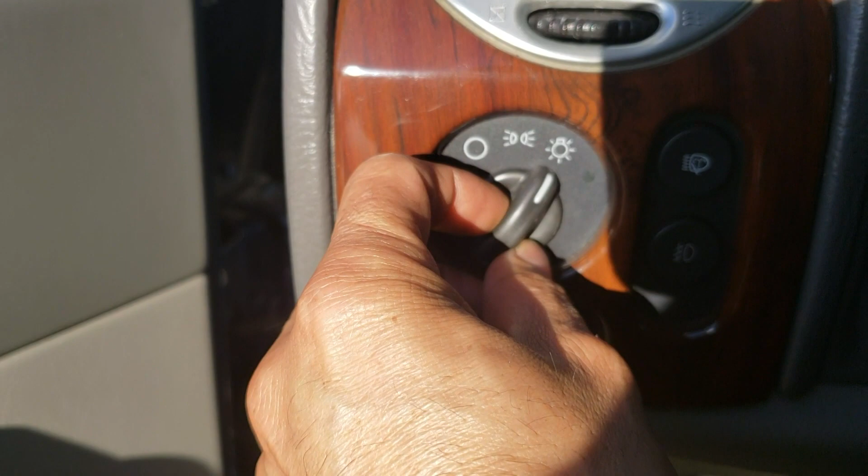Got this customer today who called me for this GMC Envoy XLT 2002. The customer concern is the headlights: the low beam doesn't work, only the high beams. So when we do this here, they work. You can see here, and if I go inside, we can probably see it reflect on the other vehicle. It's hard with this light, but I confirm that one is working, but the low beam isn't. So I'll leave it there.

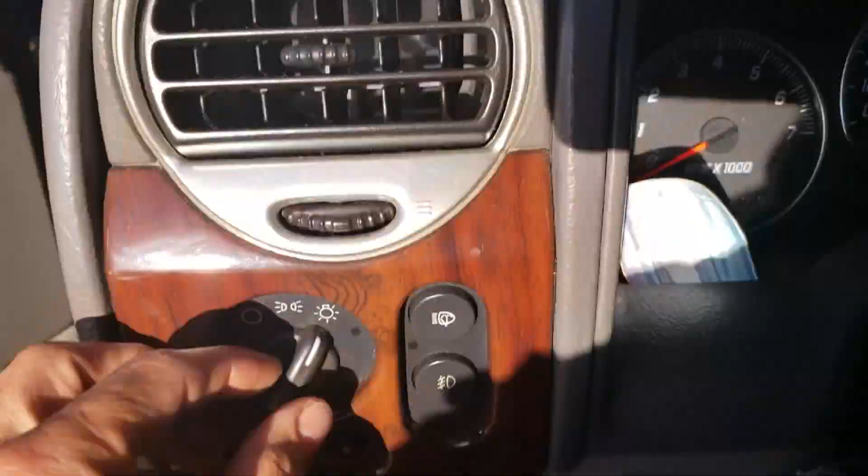We're gonna go here to the front. Pretty sunny day, and it's late in the day, so we can see here this light is illuminating. However, the low beam is inoperative on both sides. Okay, so the next step for me is to go to the wiring diagram to know where I'm going next. So pull out the wiring diagram and go from there.

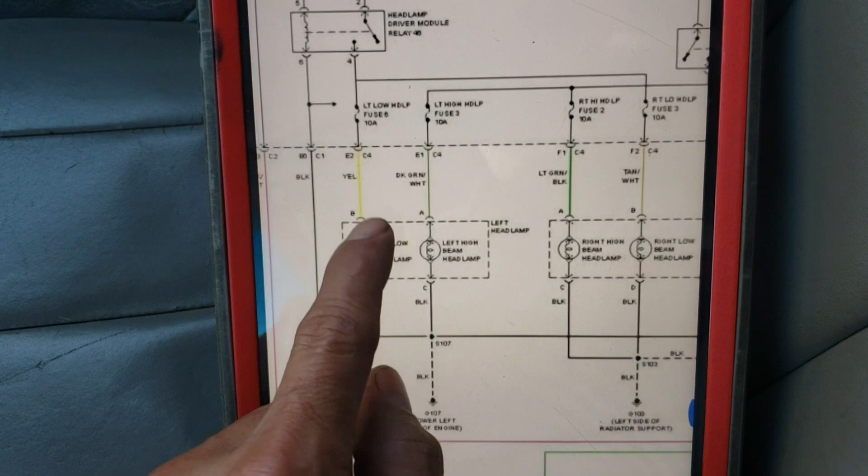So I got here a wiring diagram, and you can see here the left headlamp. Right here is the low beam, yellow wire, and this is the power side, and you got a constant ground here, lower left. So we can see you got a constant ground on the lower left side of the engine, black, and that ground is feeding both sides, low beam and high beam. So that means my ground is good because my high beams are working.

Sorry, I have to be cutting off, I get a bunch of phone calls now, so I don't know where I was.

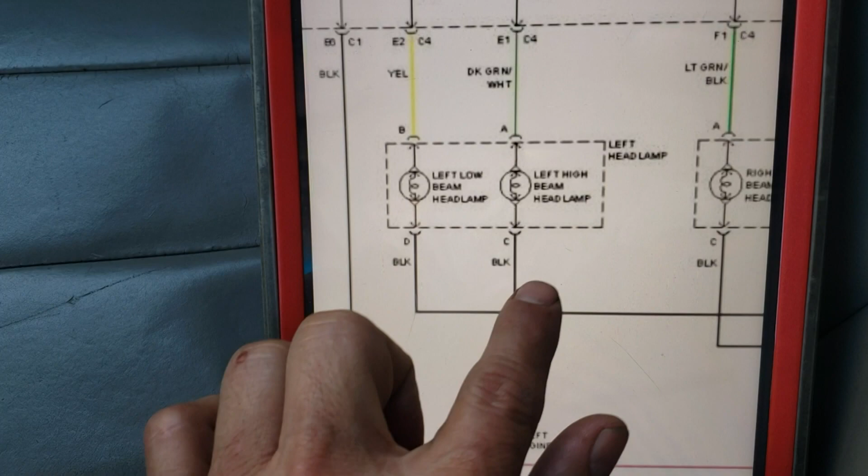However, we have here a constant ground which is shared for both low beam and high beam. So at this point I'm not suspecting the ground since my high beam is working, and my low beam on both sides is not working. So I'm thinking something in common. It could be a fuse here. You can see the yellow is the power feed to those, but it's coming from a fuse here. However, if we go here, we can see from the relay, from the switch side, it's coming here, and there is a fuse here too. However, with both not working, there's a slight chance that both fuses are blown.

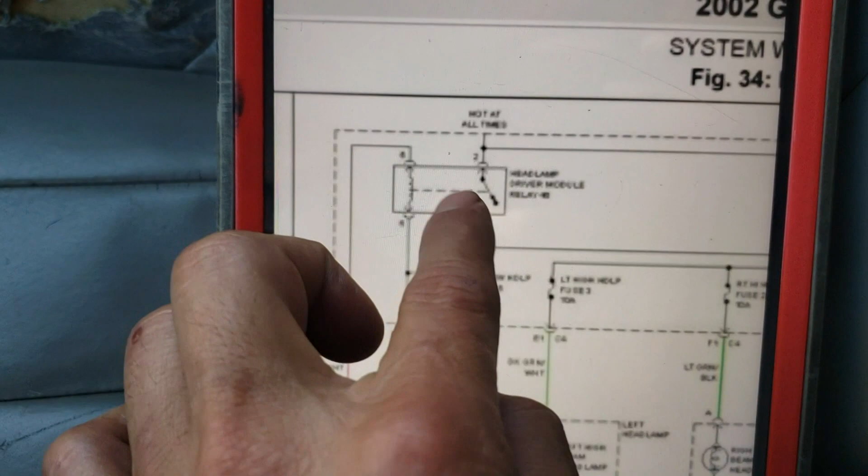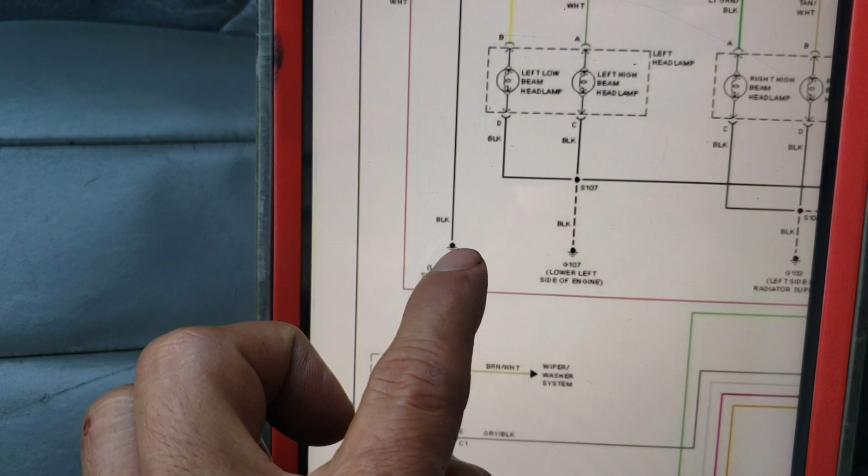So this is hot all the time to the relay right here on pin 2, and pin 4 is the switch side, which has power all the time on pin 2. On pin 4, when the coil closes, it connects here and sends the power to those. Okay, so we're gonna check the control side. Where is that coming from? On pin 6, which is this one here, we can see it is a fixed ground, so we got a constant ground. So then we're expecting this one to be the power side, by the pink and white.

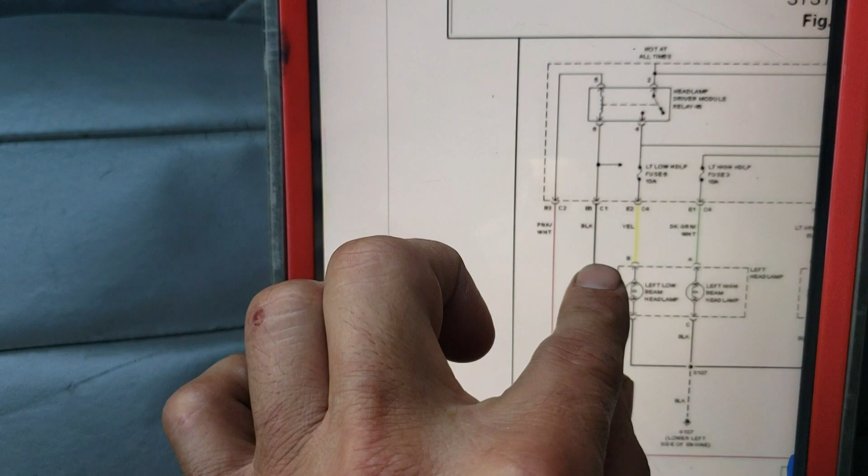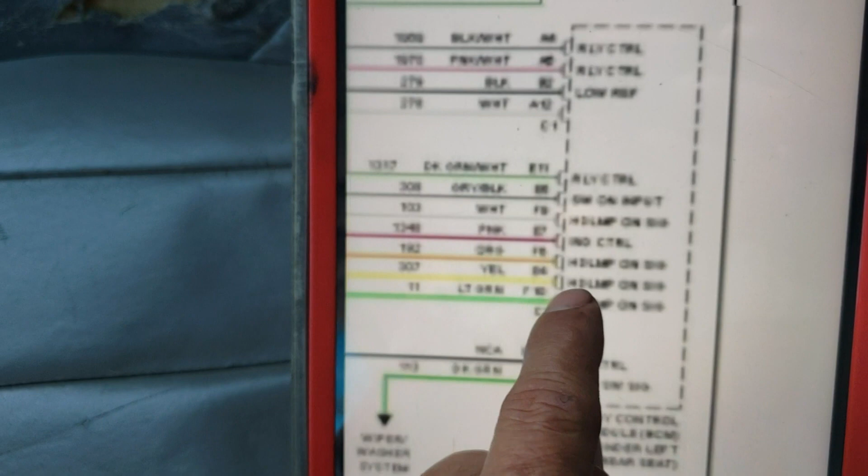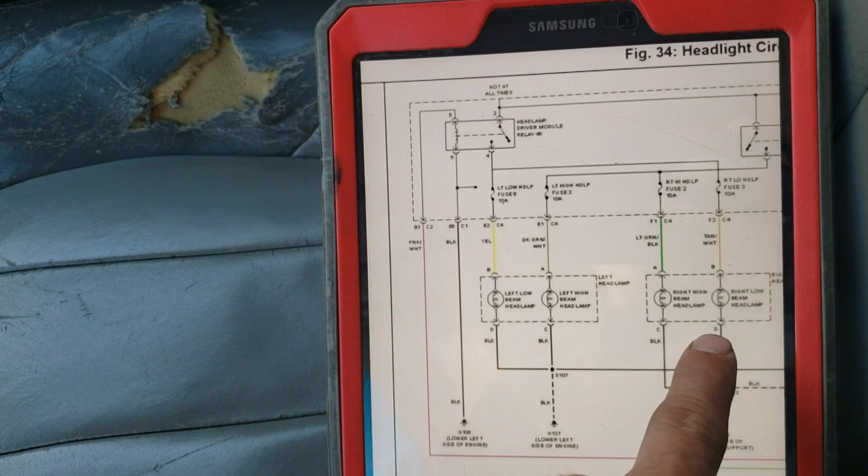Where's my switch here? Headlamp switch. So basically, head and park. So this one will be here. Switch on input, headlamp on signal, on those wires here. What this means is I have a scanner here I can use to rule out where my problem is. I can check on the body control module if it's receiving the signal from the switch, or if it's on the output side, like the body control module not sending the signal out, or the relay. So basically I'm gonna be checking those components through the scanner before doing any testing if I don't have to, to rule out what the problem is.

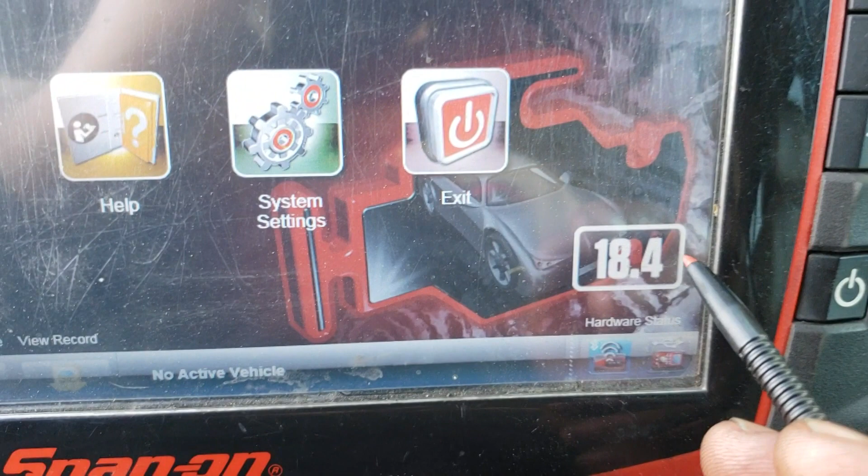Switch, BCM sending the command to the relay. So then my next step is gonna be getting the scanner. So power up the scanner, connect it, and we're gonna go from there. We're gonna identify the vehicle now and go from there. See, the latest update just came out last week. I got it from Snap-on.

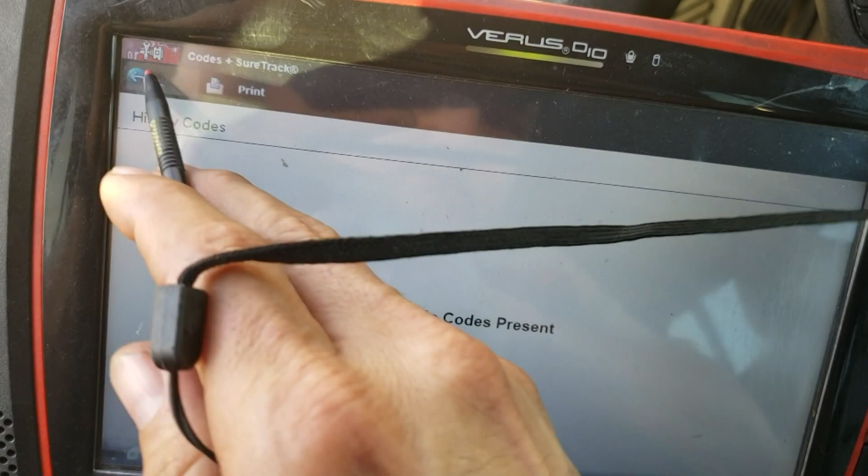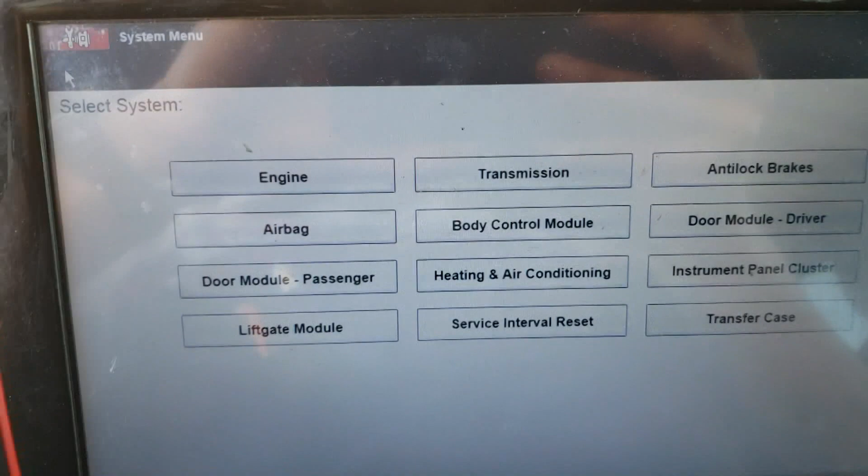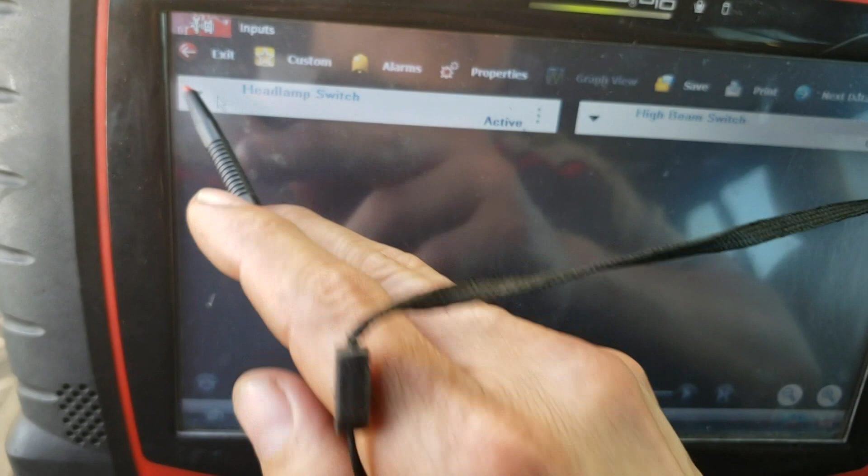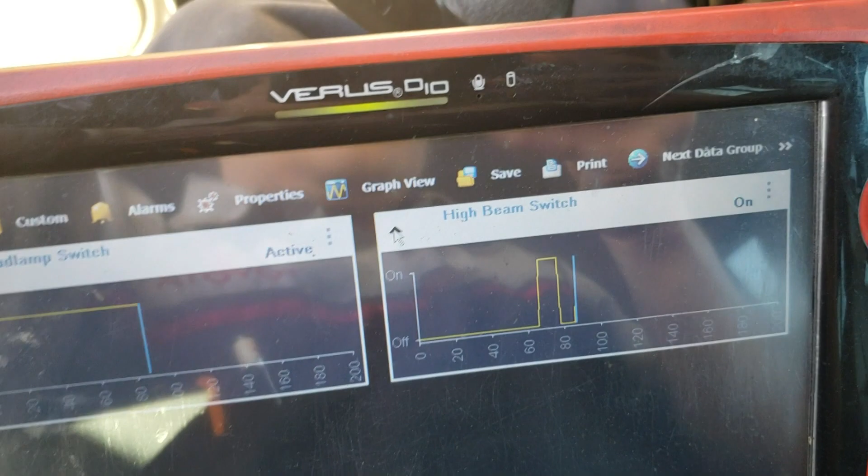So we're gonna check some inputs here to the BCM. So we can see here I'm on the body control module. Data displayed, input, custom. We're gonna deselect, and I'll put the high beam just because. However, we're looking for the headlamp switch. Okay. I'll graph those. You can see here. I will just set the high beam just because right now I'm going to show that. See, on, off. You can see here.

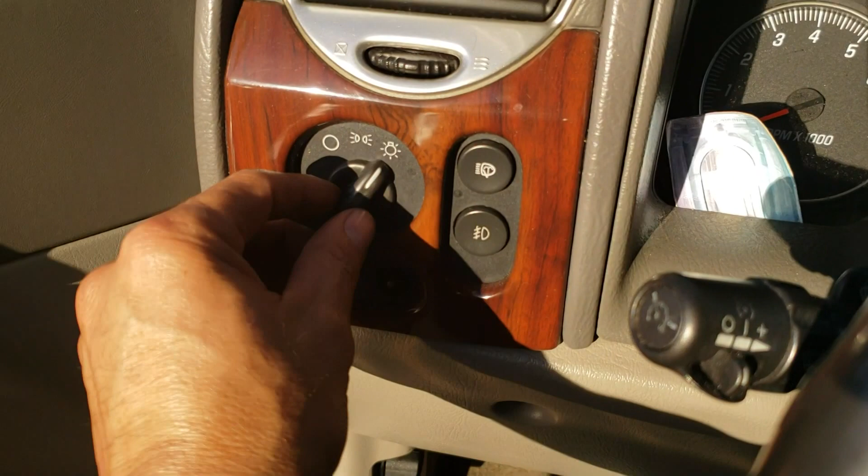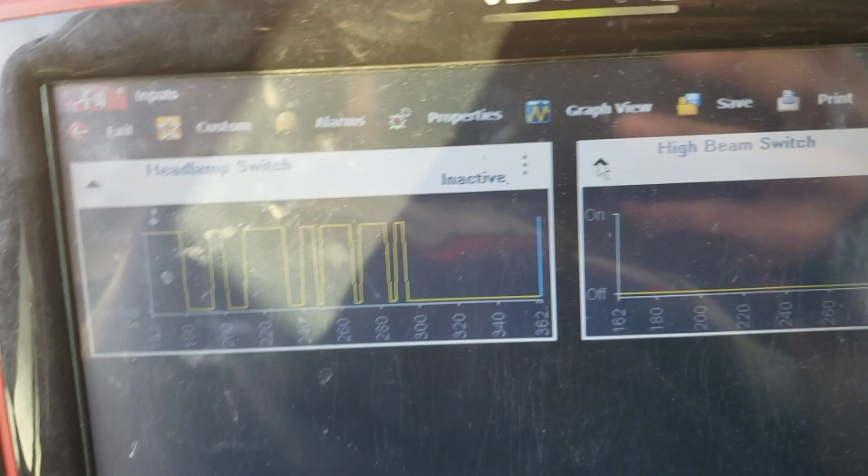Okay, scanner recognizes high beam. We know those are working, no problem. Our issue is here on the low beam. So, see. So the body control module is recognizing the signal. Okay, we got no issues there. Okay, we rule out one problem now. So we know we have good input to the BCM. The BCM is recognizing the signal. So now we're gonna concentrate from here over to find out if the BCM is sending the signal out to the relay to activate the relay coil.

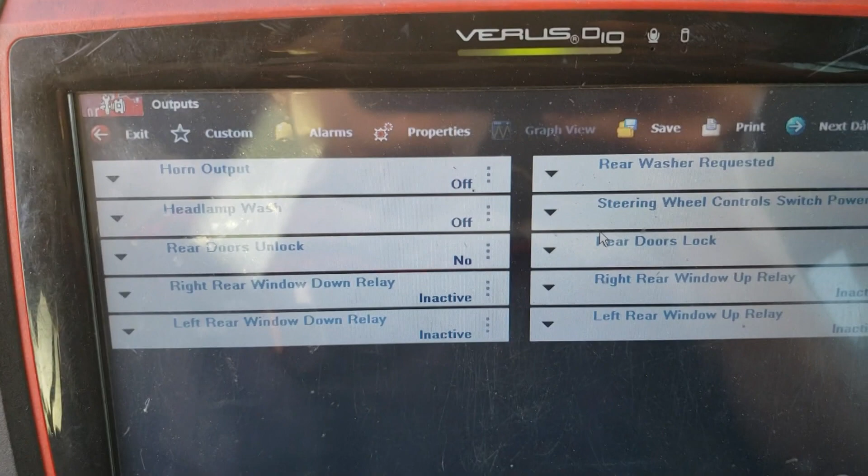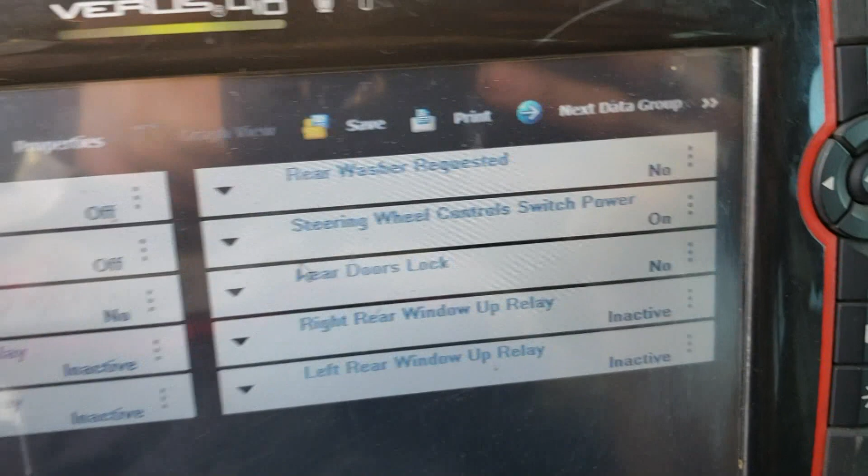Check on outputs what I got there. See on output if I have any information. No, I don't have information for the headlamps. Rear doors unlocked, so basically only for door locks. Let me push this one and see it here. Yeah, you see there I'm cycling the door locks. But nothing for headlamps for output. Okay, so no help here. Let me check functional test and see if I find that one there. Okay, we're gonna be checking right now on functional test. See if I got the option for output controls.

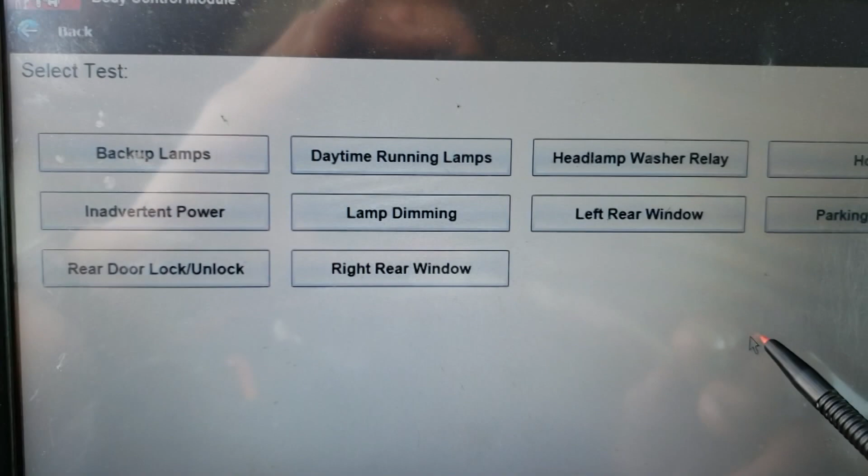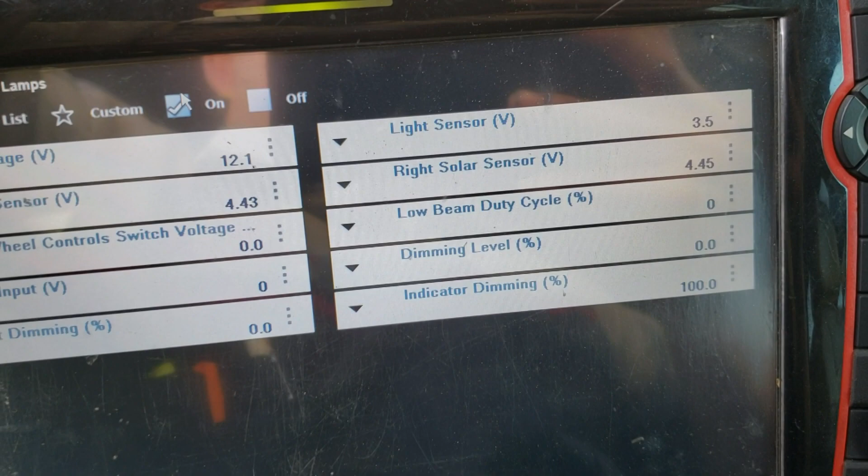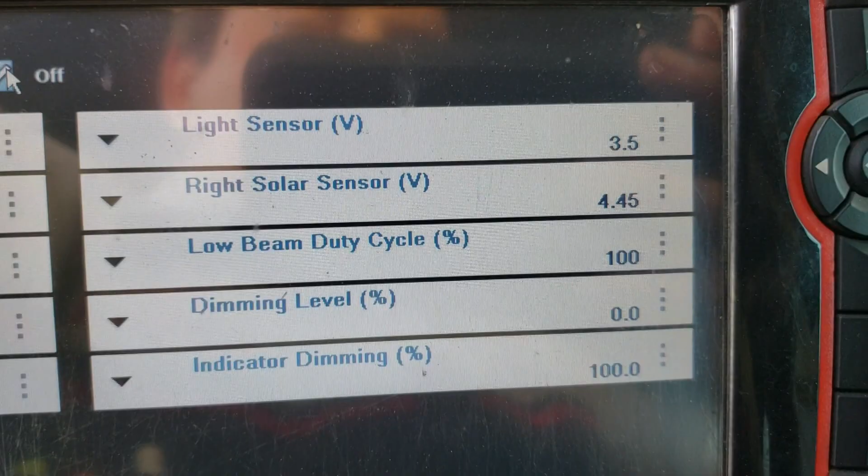Daytime running lamps, yeah. So is that gonna be the one? Let's see. Go off. Yeah, we can see on the output side when I'm moving that one here, apparently it's sending 100% duty cycle to the low beam. See? Off, on. So apparently the computer is sending what it should, through the scanner.

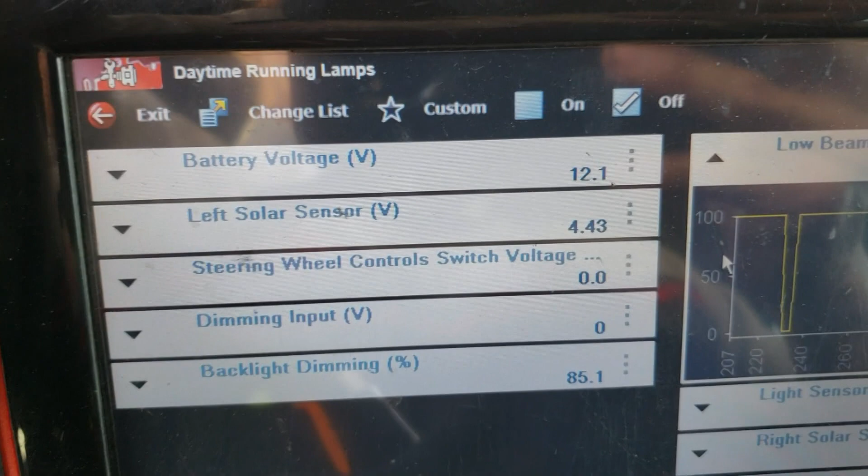So now I'm just gonna verify that one at the relay, because this is a good point, because from there I can check the whole process. The computer is showing it's receiving the signal from the switch, and it's sending the signal out here on this data. So basically what I have left right now is only verify the relay, probably with the power probe, and the signal through to the headlamps, or check whatever we need to check. Next step.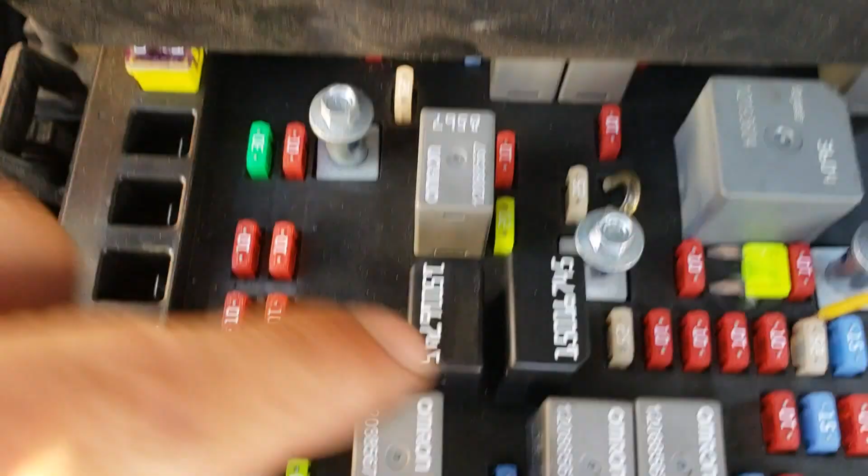So according to the wiring diagram here, I have the headlamp driver module they call relay, the 46. So it's like an electronic relay. So I'm here already open on the fuse box. We can see the 46 is here in the center, got that located. And look at this here, 46 HDM, solid state relays. HDM stands for headlamp driver module. So it's located here in the center. Okay, so it's this one. Gonna remove that one. Check the diagram here on it.

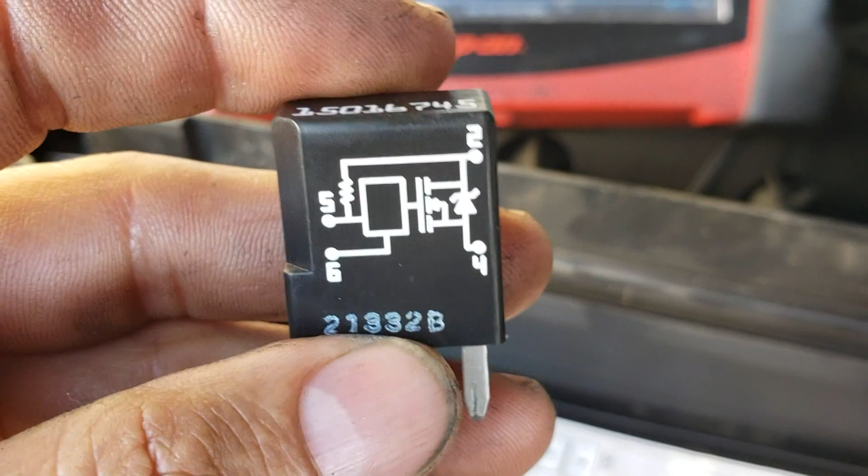So it's not the standard diagram we used to see for relays, like pin 86, 85, 30, 87. So look at that one. They got pin 2, 4, and a diode inside, like a little circuit board. They show there an internal resistor, 5 and 6. So they got the numbers here, 2, 4, 5, and 6. I'm gonna start testing with the test light and figure out what we're getting.

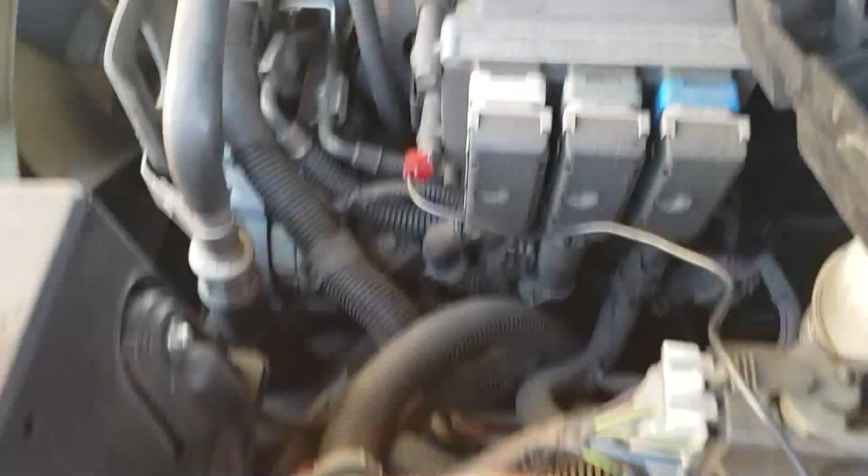So first, I'm gonna be checking for power on pin 2. We can see it says hot all the time on pin 2. So pin 2, the one on the corner. Okay, I got the pin inserted there, got my test light connected to ground, and we're gonna test at the tester first. Okay, so that's power. You can see here. Okay, got power.

Eliminated pin 2. We're gonna go from low numbers to high numbers, 2, 4, 5, 6, so that way I'm not getting lost. It's easier for me. Going to number 4, that will be the output, so we're gonna leave that alone for now. I'll go in a different order right now, since I want to check this ground on pin 6. So pin 6 is the long one on the side here. Okay, right here.

Let's move the test light to the power side, and I'm gonna test the connection of this. Do I have a good power? So look for a ground. Yep, see, got good. So we're gonna be testing pin 6 now.

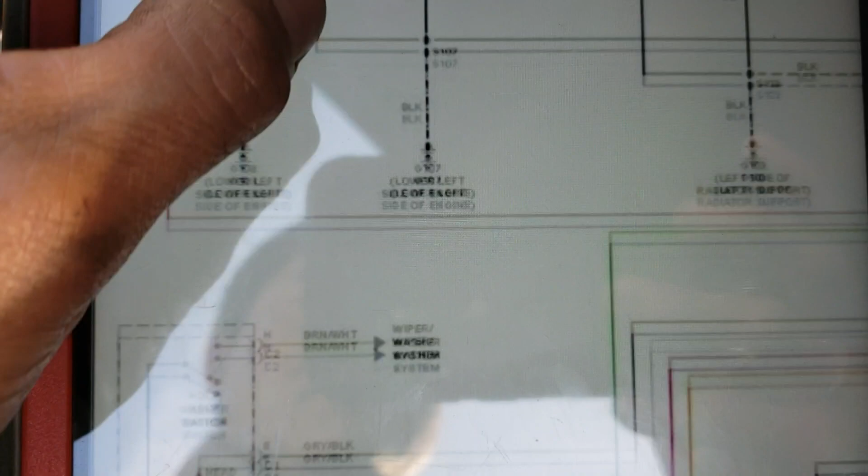Showing is on the diagram. So good, I got good power, good ground. Coming to this, now we're gonna test the control side coming out from the BCM on pin 5. Okay. On pin 5 we should be receiving power side, because on this side we got a constant ground, pin 6, so pin 5 should have power side control from the BCM. Okay, so that one will be,

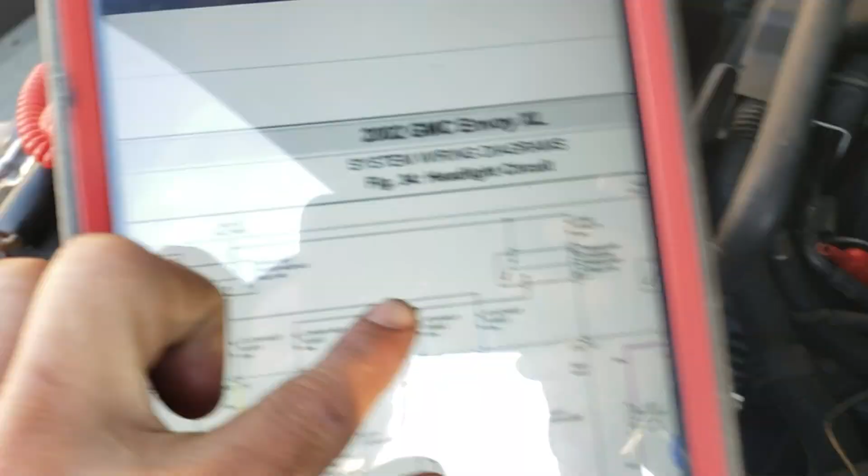put my test light here, so you can see I have my load being on all the time, so 100% duty cycle. So now I gotta hook up my test light to ground because we're gonna complete the circuit. And so pin 5, okay, where's my pin 5, is on this corner, pin 5. So we're expecting the BCM sending out the control power.

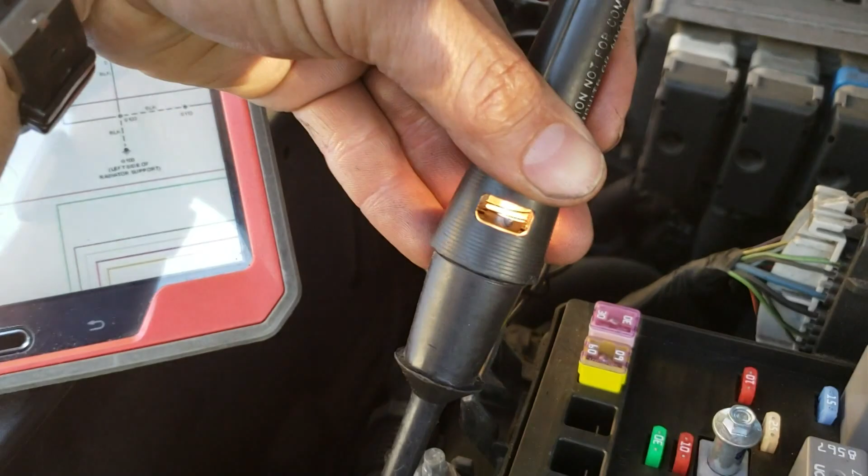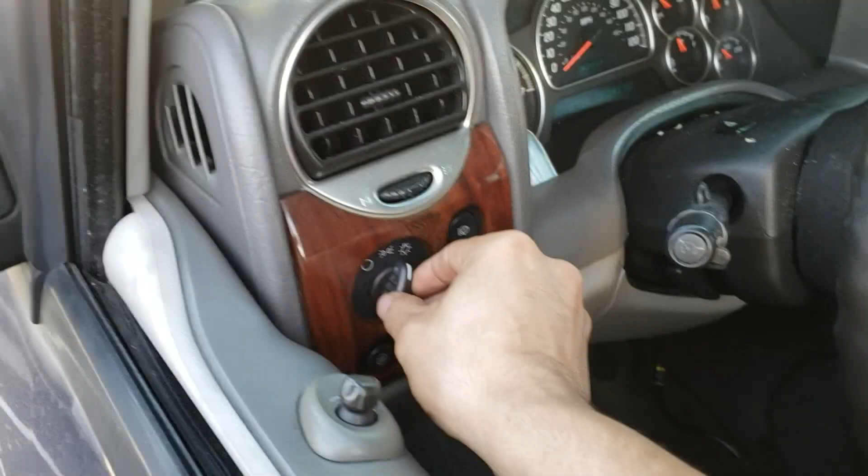Okay, my test light doesn't illuminate. It doesn't illuminate, and I have it 100%. Let me see if I turn off the switch, what's gonna happen here. Okay, turn off the headlamp, and we can see here the response. Supposedly the computer is not sending the signal, so I got nothing here. So now I'm gonna investigate a little bit more why I'm not getting the signal here to the relay. Okay,

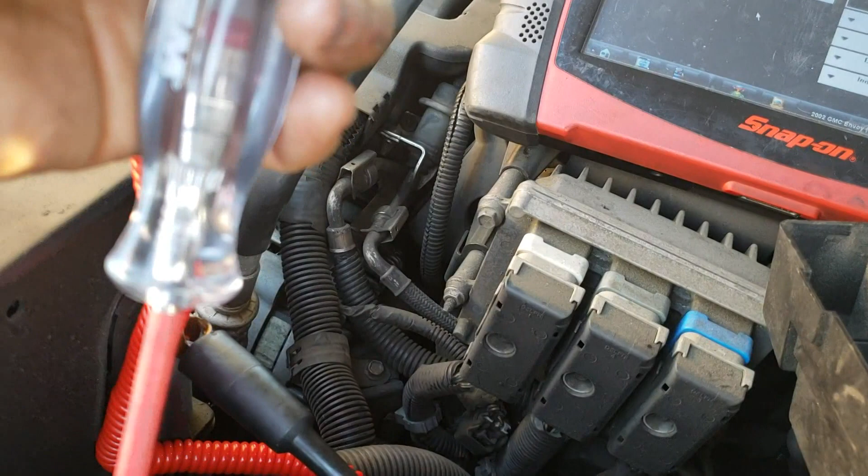so sometimes what happens is when we're using a test light for a computer controlled circuit, the test light can pull down the voltage. So this is a very high resistance test light. This is LED, so this one shouldn't be stealing too much. So pretty much it's taking a sample. We can see here I'm connected to ground, and we're expecting this one to have power on pin 5. So let me touch it. Get nothing. See, get nothing. Saying 100% on. Okay, we check my light. Okay, we're gonna see what different testing approach we're gonna take right now, because this is pointing to a wiring issue or BCM not sending out the signal.

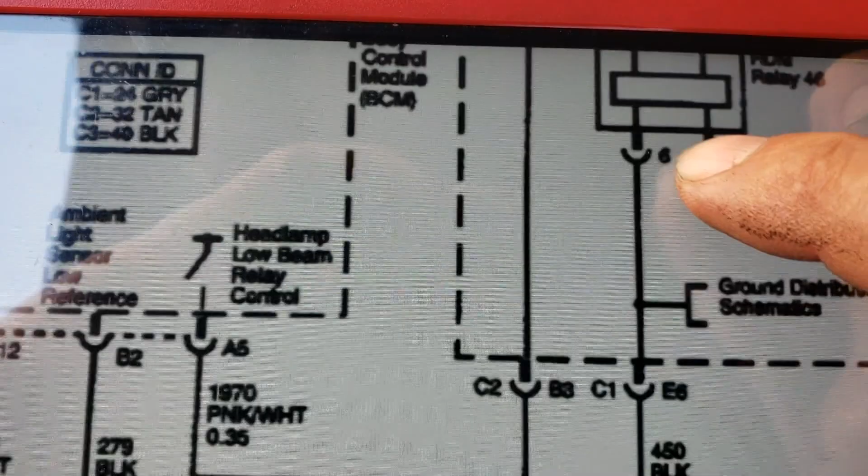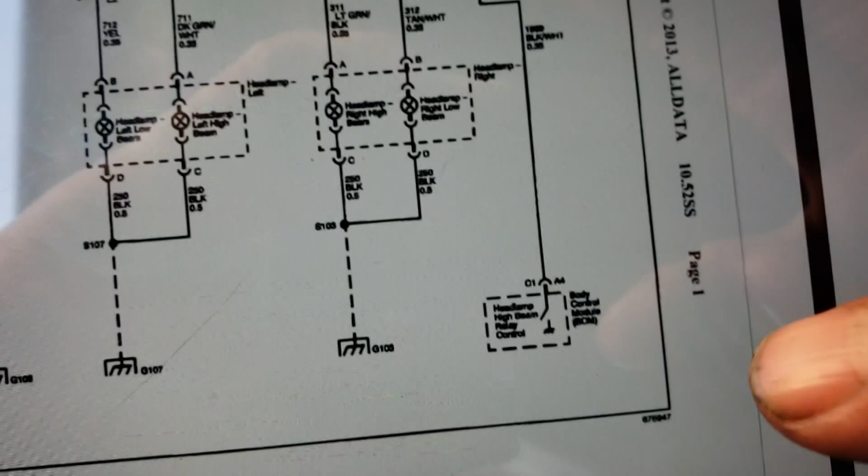And right here, headlamp low beam control relay. So that one is showing me inside it's connected to power, because when it is connected to ground, let me look for something here. It's connected to ground. Usually they use a little sign like this, but internal to the computer they like to use something different. But what is a little weird here, well, pin 2 and 4, pin 5 and 6, but the same thing, you know. See, this one is ground on pin 6, and pin 5 is coming out of the BCM. And apparently it's power side control. I'll show a ground side control internally in the computer, so let me stop this and I'll show you that.

I'm still looking at the BCM here. As we can see here, it says BCM body control module on this corner, and look at this. This is what I'm talking about. This is a power side headlamp on indicator. See, that one you got like a little ground switch style there, and it's going to ground. So that one is showing like going to power. So apparently the BCM is sending out power control to that relay. Why am I not getting that? Okay, I'm gonna go through a little bit more investigation here.

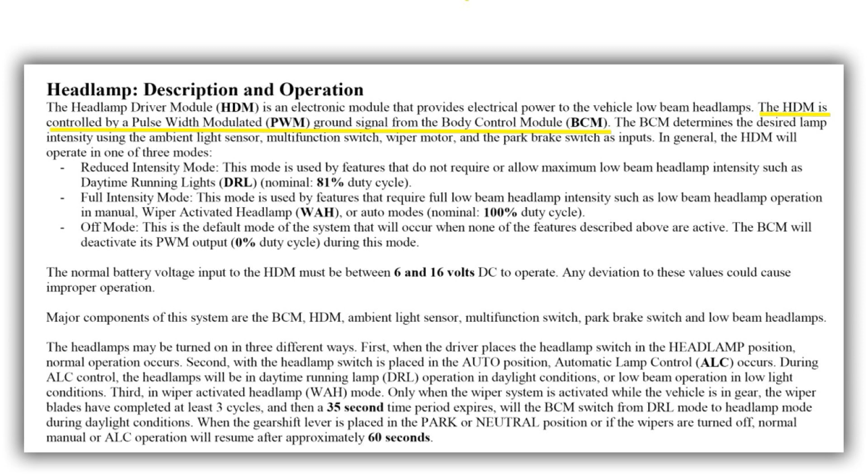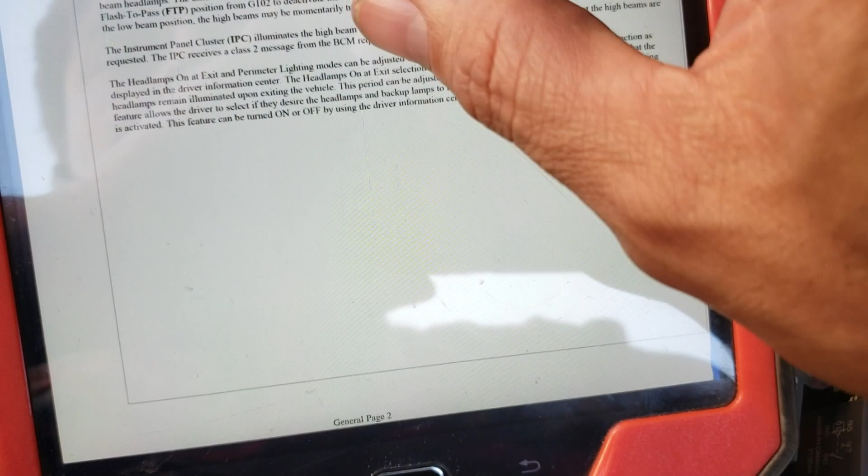Now it's time to go for the description and operation of the headlamp. So headlamp module, I won't read everything, but I wanted to see what it's telling me, what the computer is sending out, what the computer is doing when it's doing its own thing here. Just doing duty cycle for daytime running light, so it's sending less. But look at here, this is interesting. Headlamp, where is it? Right here. I saw something here that caught my attention.

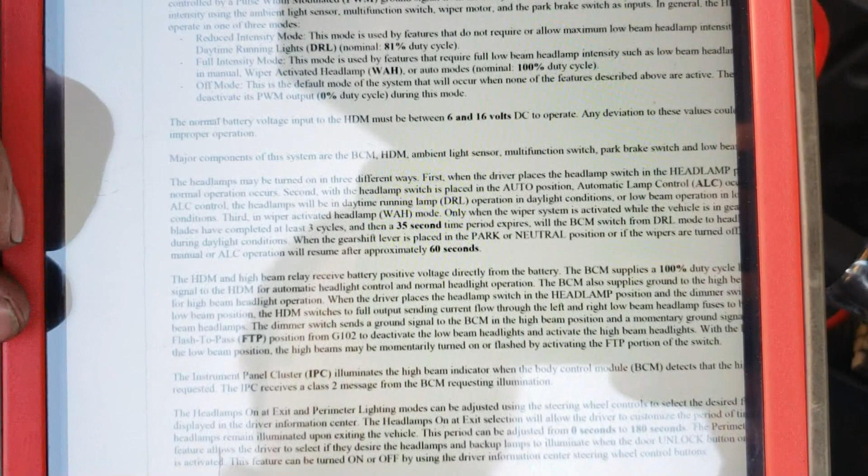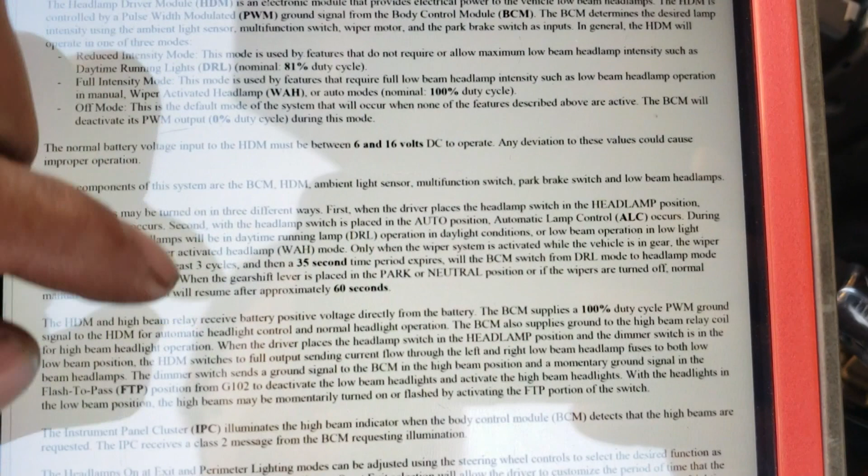Okay, right here. The headlamp may turn on in 3 different ways. But it doesn't tell me what the computer is sending, if it is sending out. I'm reading this area here. Okay. This is about high beam, so I don't want that one. I want this one.

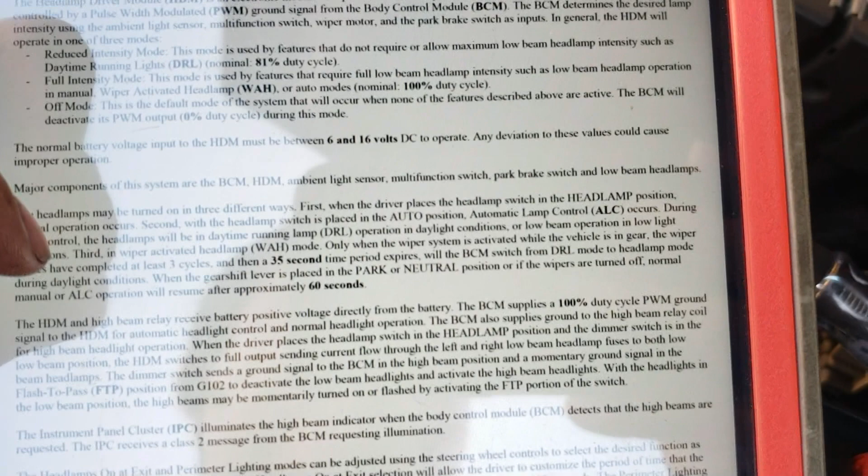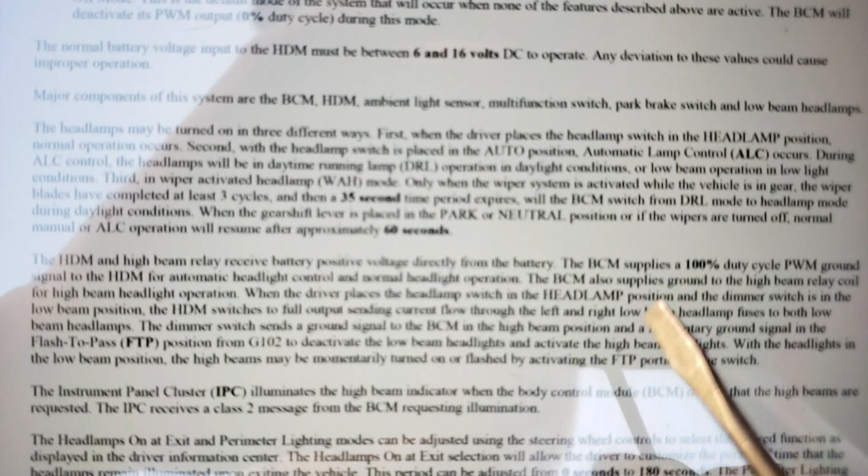But on the headlamp, look at this one here. This is saying it's for the high beam. Where is it? I saw something here that caught my attention. Oh, right here. The BCM also supplies ground to the high beam coil relay. Coil low beam position.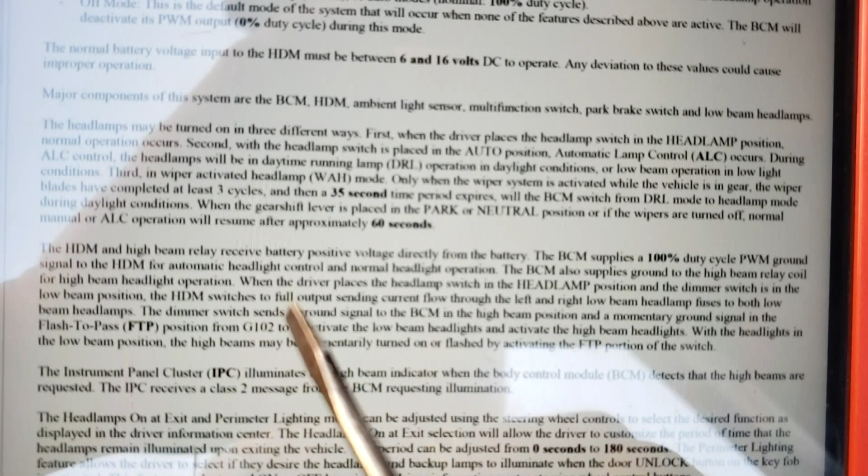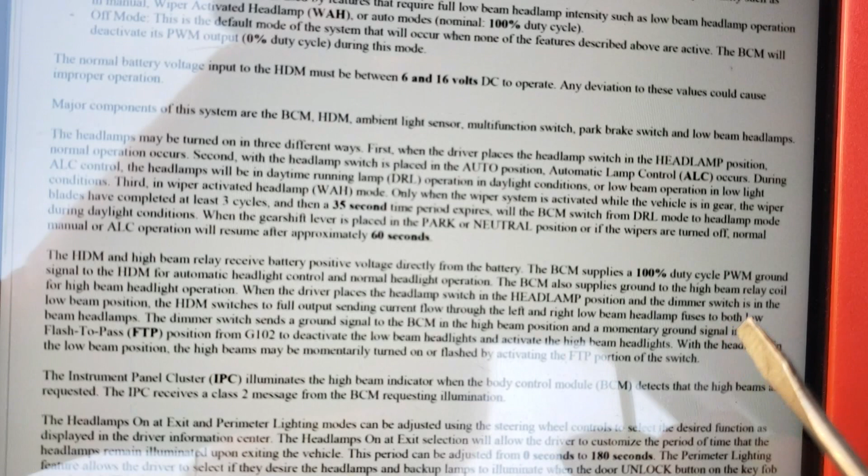The headlamp position in the dimmer switch is in the low beam position. The HDM switches to full output, sending current flow through the left and right low beam headlamp fuse to both low headlamp beams. So this is saying the BCM supplies ground to the high beam relay coil, low beam. Let's see, we're going to check if we've got ground.

Then we have the test light here. Let me verify that one. Okay, supposedly this is the high side, the high beam, not the low beam. It's saying supplying ground. Let me move to the power positive side on the battery. So the computer is supplying ground. Let me verify my light. Right here, okay? Apparently, yeah, it's sending ground. Two grounds to control the relay. How this electronic stuff works.

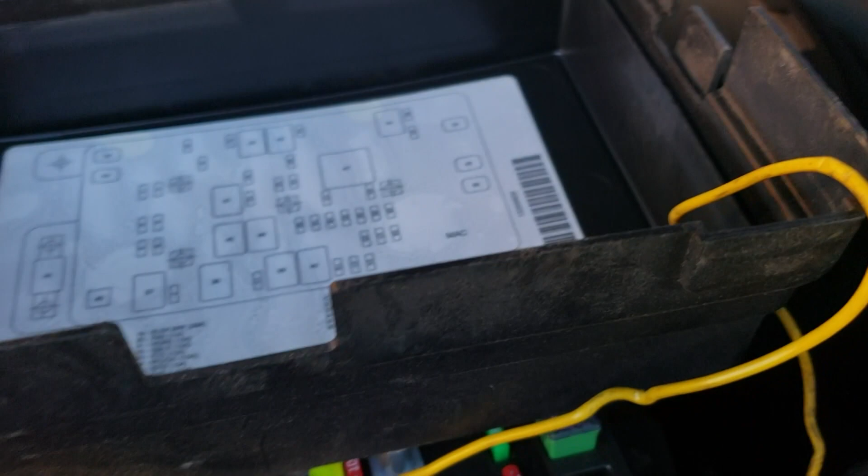Let me leave it here. I wanted to press on... ouch, I need more hands. Can't do it myself. I wanted to press that button on the functional test here, because right now it's on. I may not be able to do it. Let me see if I can hold this one with the test light in place. I don't want to lose that one. Now, okay, right there. See the test light illuminating 100%.

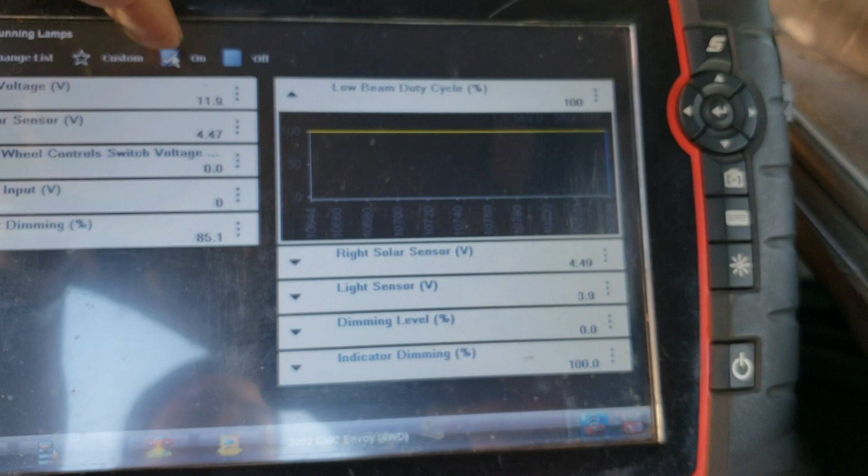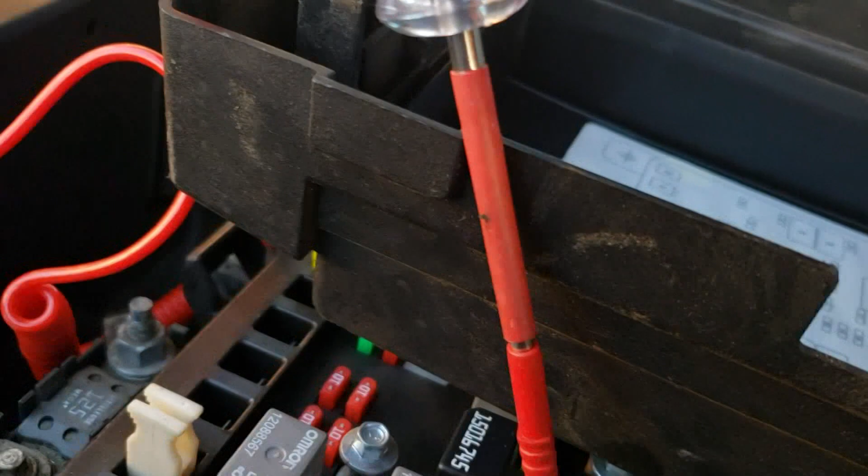Let me see if I go off. Off, on, off, on. Look at that. So the BCM is sending out ground. Really? Two grounds to control the relay? Play with the on and off button there. On, off. On, off. So we can see it here; now it's off. Now I'll go play with the switch here.

Let me see something here. Let me get out of here. Off. Doesn't go on because I'm in bidirectional control. I get out of the bidirectional control, and we can see that here. Let me reach inside with my other hand to the switch. Oh man, is that really sending two grounds? Who knows how they control that one, but this can easily mess up your diagnostic and make you think you have a computer issue.

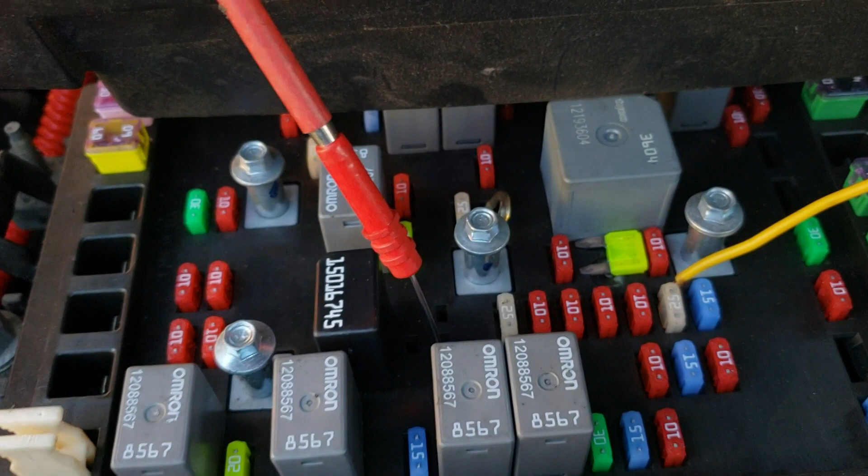Okay, I'm done with the testing. Apparently we have control, so the only thing left is the output side to the headlamps. But maybe we have a bad relay. I have a good relay here; I can swap that one in and see what happens. But I needed to show how the system worked, for myself too, because this one got me for a minute. I was thinking I had bad computers. So let me go here.

You won't hear noises on this because it's solid state, so they don't make noise. Do I have the headlights on? No, right now. Let me turn that on and see what happens. Okay. And of course they're working. See, they're working. So I'll pull out the relay here. You see what I'm doing? We've got a bad relay.

At the very beginning, you could have done this test, swapped the relay, no question about it. But imagine if you don't have two relays on this thing. It might be cheaper to throw a relay at it, but this relay is about $50; I priced it already. And we would have missed the opportunity to learn how the system works, and that we have two grounds controlling this relay. So the fix is the relay. To install a relay, we have everything we need here.